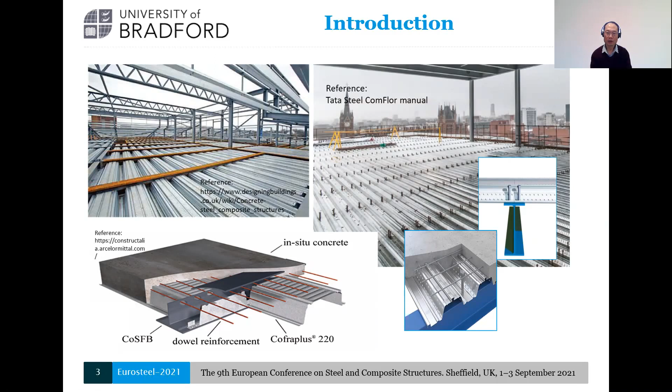Currently, composite beam systems are extensively used in construction practice. However, the traditional composite system uses shear connectors welded on the top flange of the steel beam. This makes dismantlement in the future impossible, and also makes reuse of the structural member impossible after the building reaches its design life. So the demountable shear connector will be a development for shear connection.

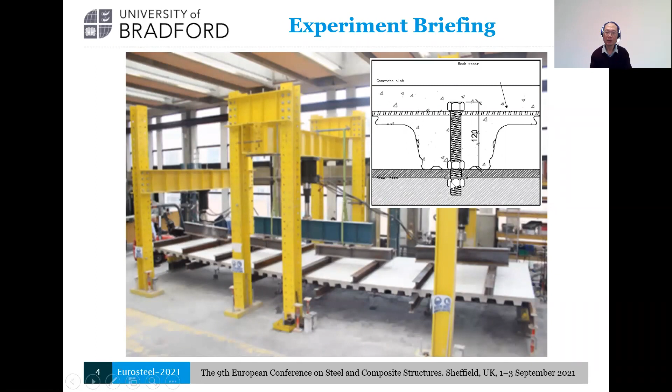A research project was carried out at the University of Bradford. We use the cellular beam, and we use the demountable shear connector.

The composite beam system is 11.2 meters in length, 2.8 meters wide, slab depth 150 millimeters, and the cellular beam depth 427. The top T of the steel beam is a universal beam, and the bottom T we used for the cellular beam is a universal column. So the flange area ratio of the bottom flange to the top flange is 2.4. The shear connector we used is grade 8.8 and 20mm bolt.

Close to the end of the composite beam, the shear connector spacing is 300mm. Close to the mid of the composite beam, the shear connector spacing is 600mm. The shear connector was embedded in the slab 120 millimeters.

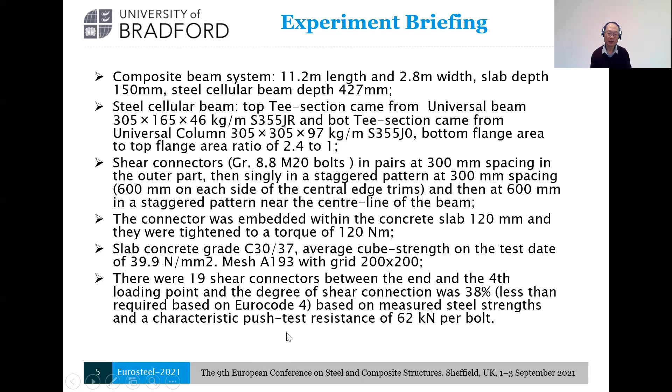The concrete slab material grade is C30/37. The tested strength of the concrete is about 40 Newtons per millimeter squared. The degree of shear connection was 38%, which is a little bit less than the requirement based on Eurocode 4.

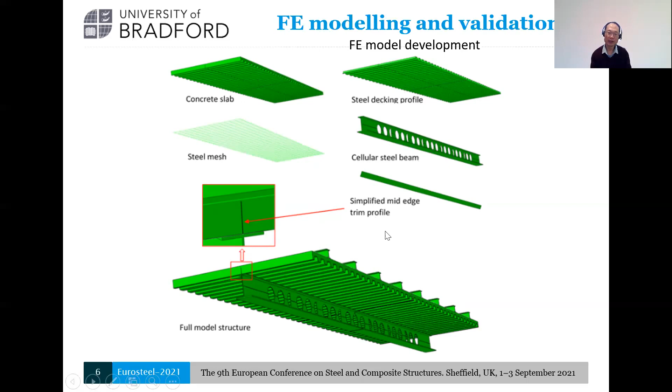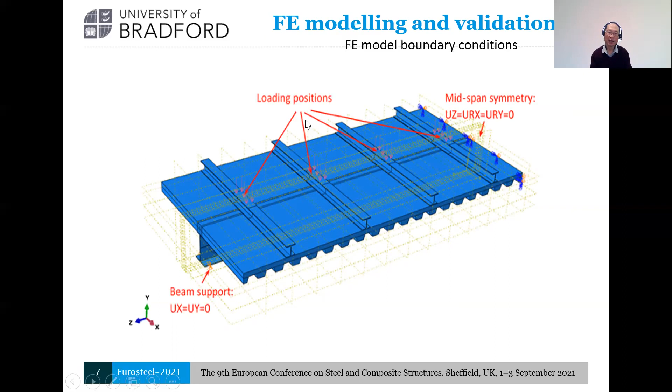Here is the boundary condition. In order to save computation time and make the modeling easy, we just use half of the structure in the modeling. You can see the mid-span symmetry here, the loading position, and also the end support.

This is the concrete model we used in the FE model for the composite beam system. As you know, the cubic concrete strength is 40 megapascals, so we take 32 as the cylinder strength of the concrete.

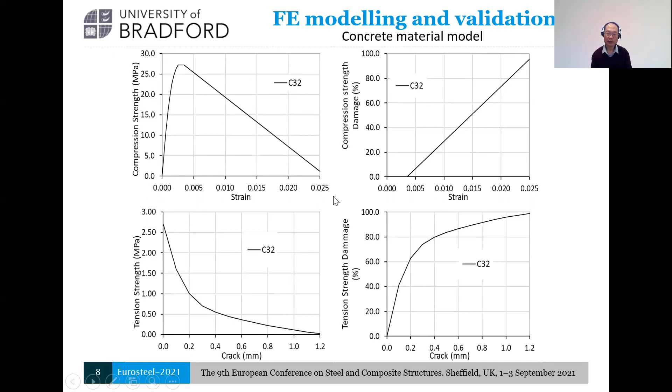For shear connector behavior, because we didn't model the shear connector bolt as a solid element, we just used the connector element available in Abaqus to simulate the shear connector.

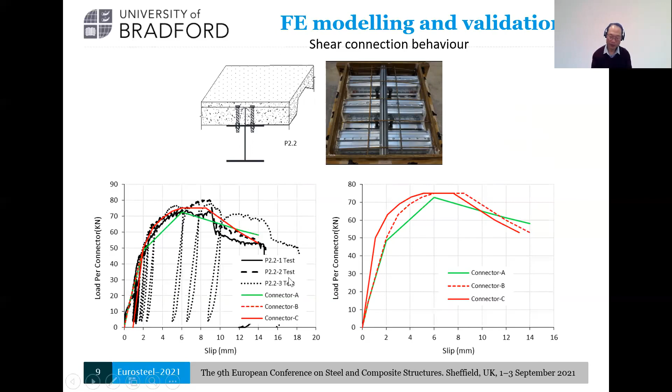Based on the push-off test carried out at the University of Bradford, we developed 3 different shear connector models for the composite system. The first, A, represents the lower curve. The second represents the average curve. The third represents the average curve but removes the slip caused by the gap between the shear stud and the hole.

Here's a comparison of the load to mid-span deflection. You can see very good agreement achieved if we use shear connector models A, B, or C, but C is the best one, where we remove the gap between the shear connector and the hole.

From here we also consider full connection and no connection cases. You can see the difference.

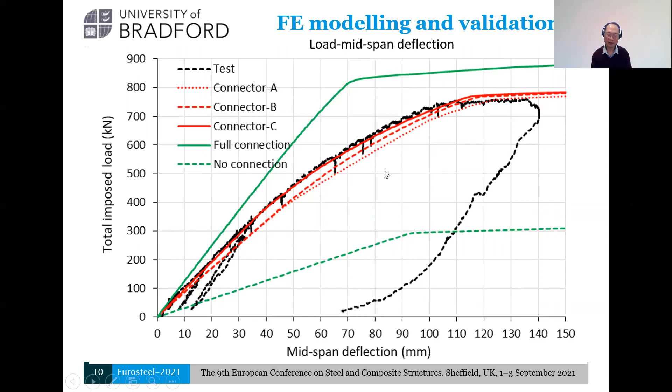This figure shows a comparison between the end slip results, and you can see very good agreement achieved.

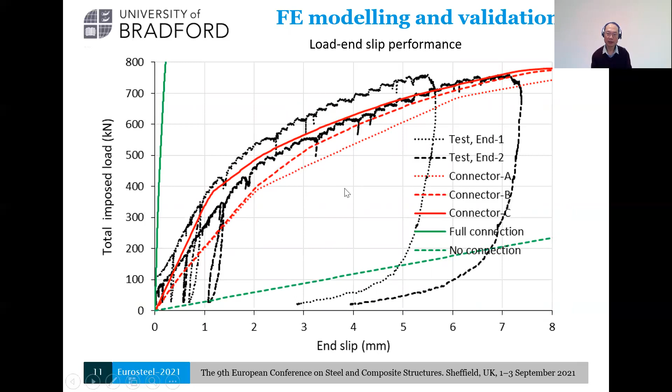This figure shows the loading and mid-span strain relationship. Again, very good agreement achieved.

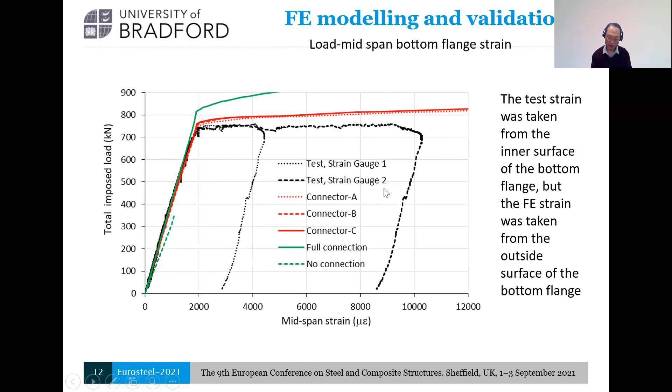This figure shows the stress distribution. You can see compression in the top flange and tension at the bottom flange.

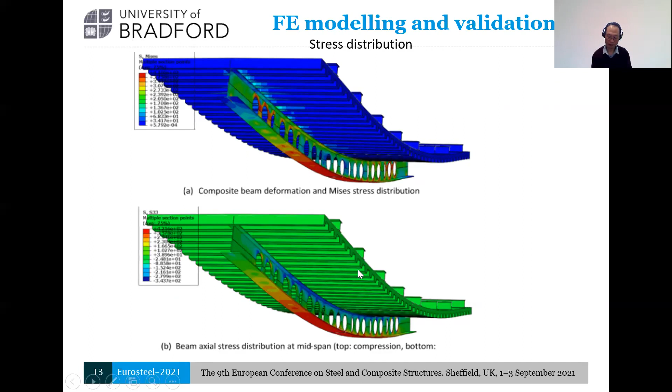Before we conducted the parametric study for concrete strength, here we show 5 different connector models using different concrete strengths: 20, 30, 40, 50, 60.

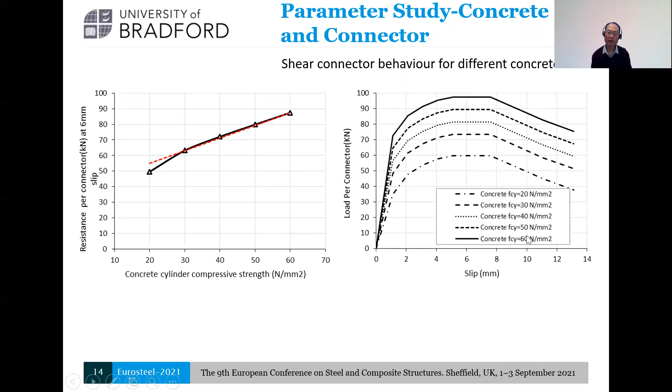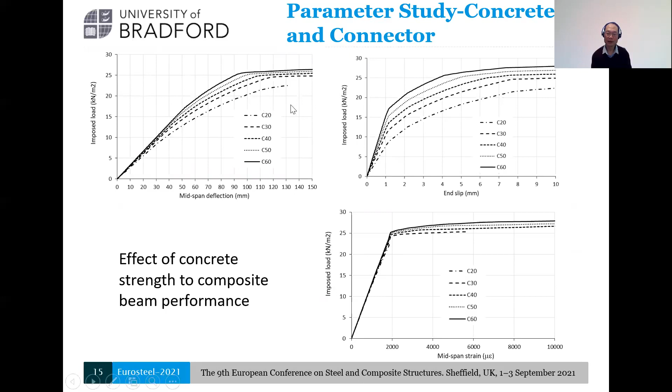Here is the comparison using different concrete strengths. You can see the higher the concrete strength, the higher the capacity, and of course the lower the slip.

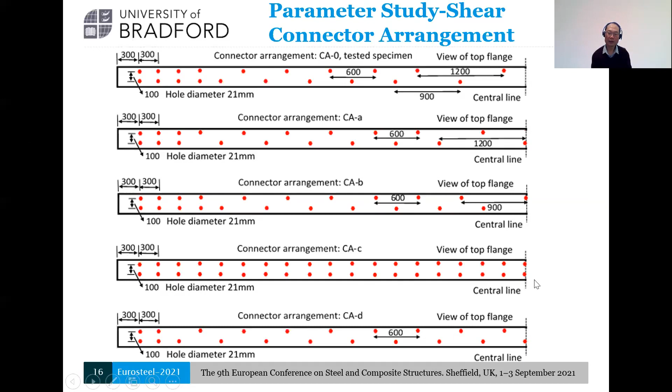In the parametric study, we also considered 5 different shear connector arrangements. In 4 of them, at the end of the composite beam we use pairs of shear connectors, but close to the center of the beam we use fewer shear connectors. But one case is different, where the arrangement close to the end and close to the center of the composite beam are the same.

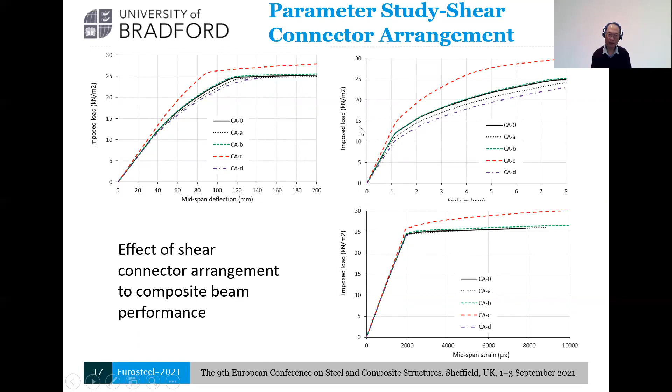Comparing the effect of shear connector arrangement on composite beam performance, case 4 achieved the highest capacity. The shear connector arrangement affected the behavior, the end slip, and also the capacity of the composite beam system.

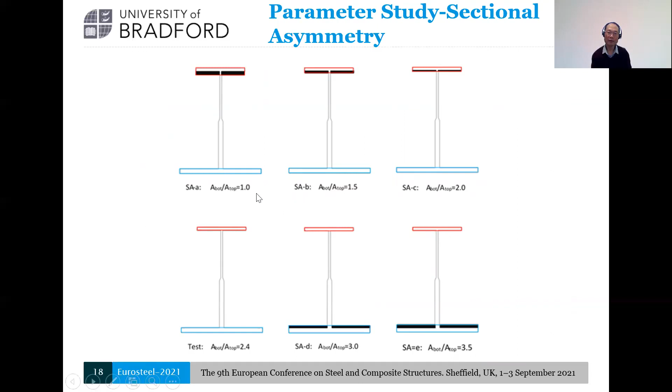We also carried out a parametric study on the asymmetry ratio, the bottom flange to top flange area ratio variation from 1 to 3.5.

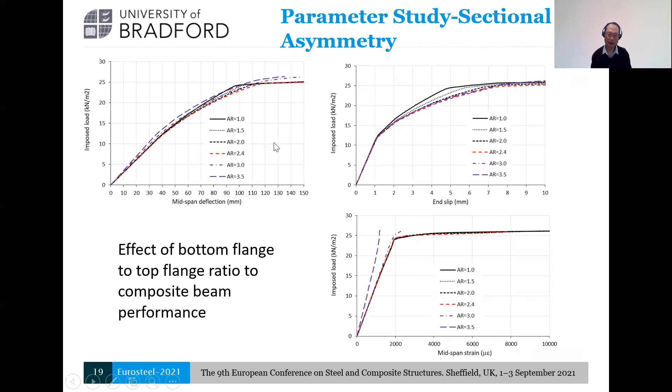This slide shows the effect of the bottom flange to top flange ratio on composite beam performance. You can see some difference here in the capacity, but the correlation is not very evident.

Conclusion: First, the FE model developed was validated against the experimental study, and very good agreement was achieved. The FE model developed in Abaqus software could be used to simulate the structural behavior of the composite beam, including bearing capacity, deflection, slip behavior, and the failure mode.

Third, the shear connector arrangement affected the composite beam's behavior. Shear connectors close to the beam end contribute more shear resistance to the composite beam system due to the occurrence of higher slip close to the end, thus pairs of shear connectors are recommended.